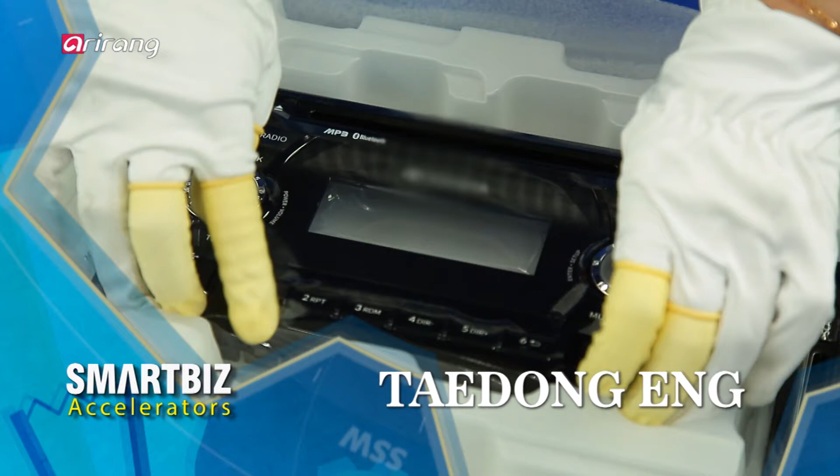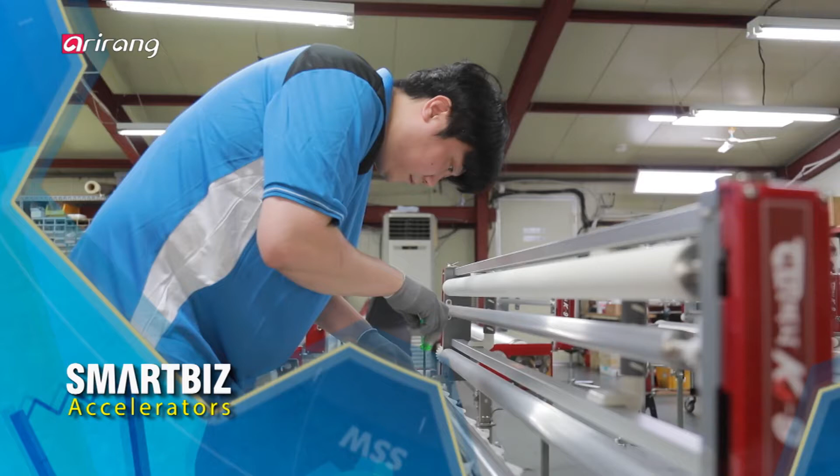SmartBiz Accelerators introduces domestic small and mid-sized businesses that have led various industrial sectors with innovation. This week we look into Taedong ENG, a company specializing in paintwork of automotive parts; Yujin MC, which develops machines useful for life; Eunjin High-Tech, a manufacturer of household appliances through insert injection molding; MPICO, which has developed diversified plastic goods based on advanced technologies; Bora Electric Machinery, a producer of position and tension control products; and Gangdong, a developer of high-precision processing technologies. Stay tuned and explore the innovative changes taking place in these businesses along with the application of a smart factory system.

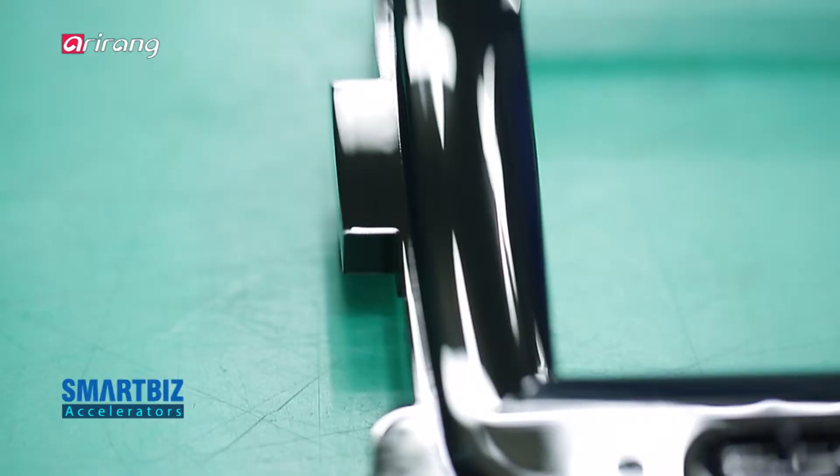Interior materials enhance driver convenience and vehicle value. Taedong ENG is an automotive parts painting company that specializes in painting interior materials like displays and audio devices. Its signature high-gloss paintwork is gaining customers' trust with excellent quality. To realize the perfect color, it has established a mixing program and is improving painting quality through robots. We explore Taedong ENG, a company that leads the automotive paint industry with high-quality technology.

Taedong ENG is located in Chilgok-gun, Gyeongsangbuk-do Province. It specializes in painting and assembling interior materials of cars. Products produced by skilled painting technicians with more than a decade of experience are recognized for quality not only at home but also overseas.

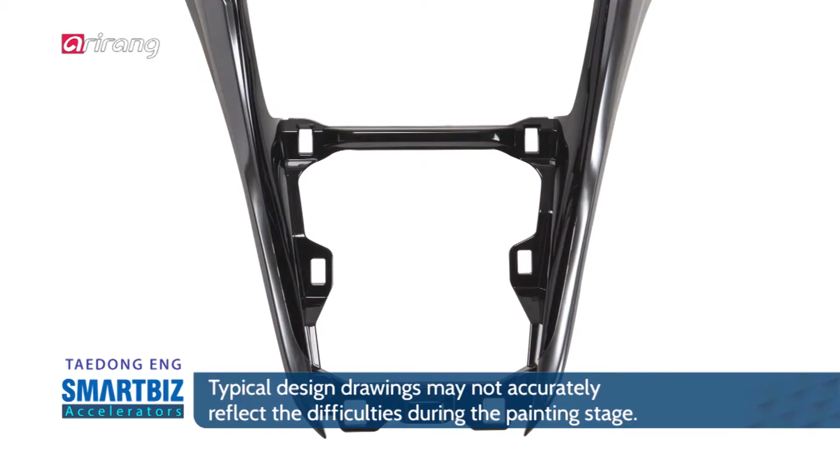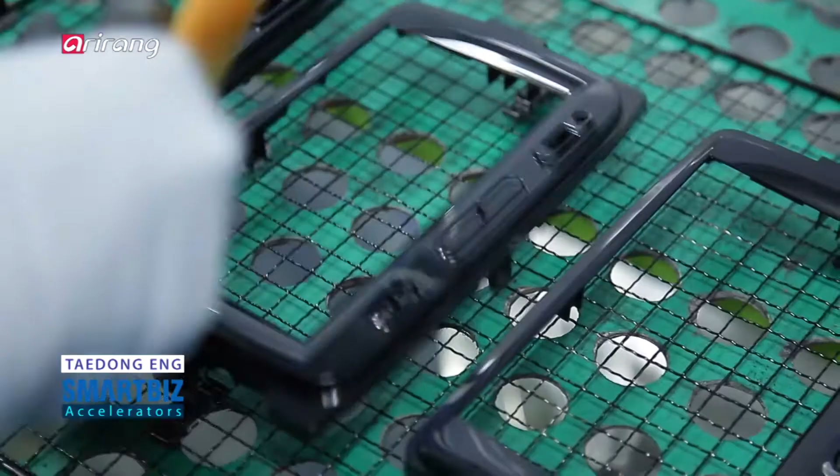Taedong ENG pays close attention to provide an optimal product that corresponds to customer needs. In addition, it thoroughly blocks the inflow of foreign substances to prevent scratches and increase the overall level of completion. In the high-gloss painting process, a drying operation is conducted to remove any moisture or gas from the products.

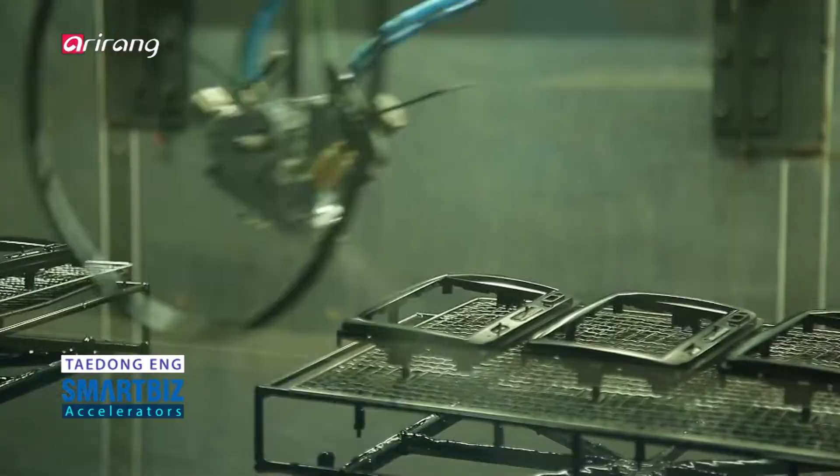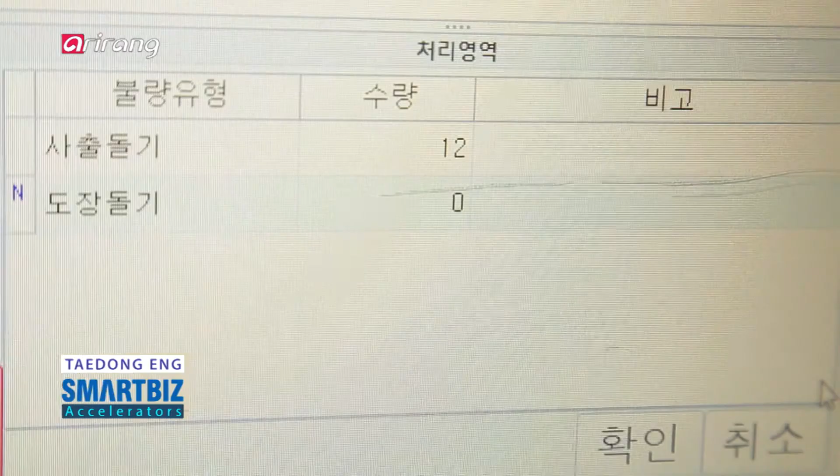The company introduced a partial MES system by participating in smart factory innovation activities. An efficient collaboration system took place as internal communication became more efficient.

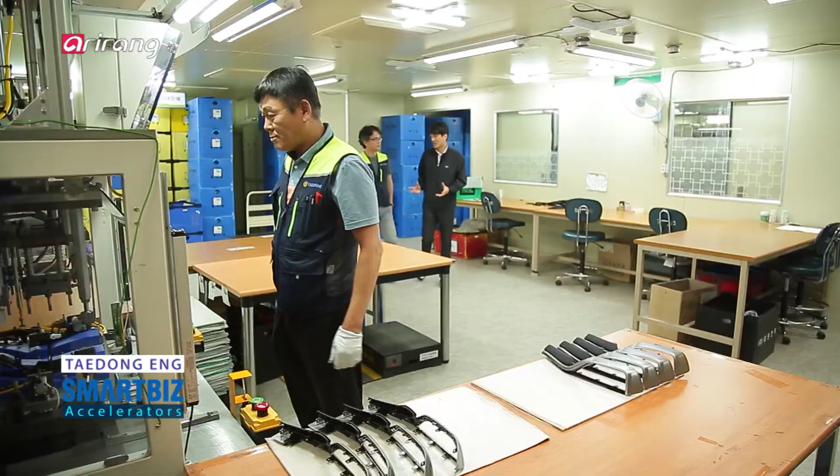The level of satisfaction from its clients is high, as Taedong ENG thoroughly manages contamination and maintains a high level of product quality. The firm makes sure that there is no problem with timely delivery, even in the case of emergency orders.

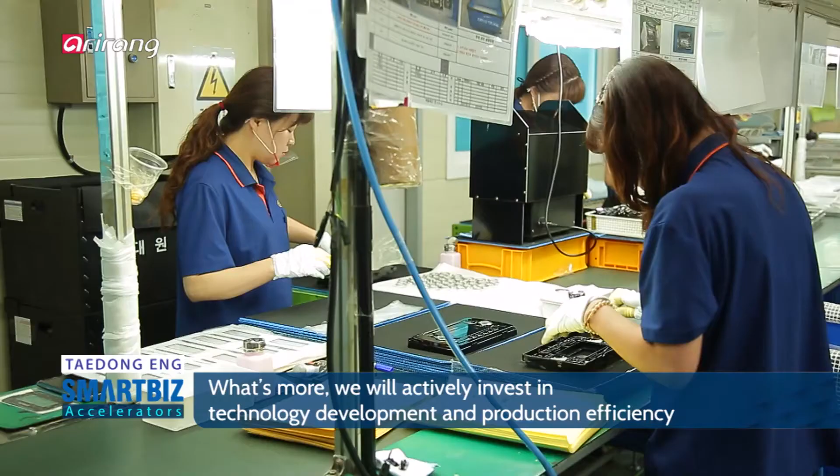Taedong ENG leads in the automotive painting field with its high-gloss paintwork. We hope the company will grow into a global company that is recognized by automakers around the world.

Machines have contributed a lot to improving the quality of life. Yujin MC is making life more convenient by developing various machinery.

It is creating a better environment with its product Wallpaper Doctor, which takes into consideration the health of both paper hangers and tenants.

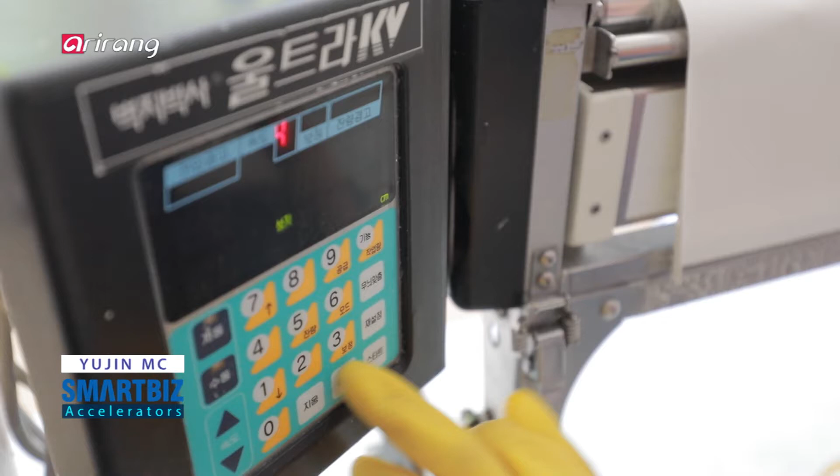Noodle Robo, which automatically cooks the noodles, is also adding to user convenience. Yujin MC is also developing other machines to be used in the kitchen for cooking purposes.

We explore Yujin MC, which possesses a wide variety of products.

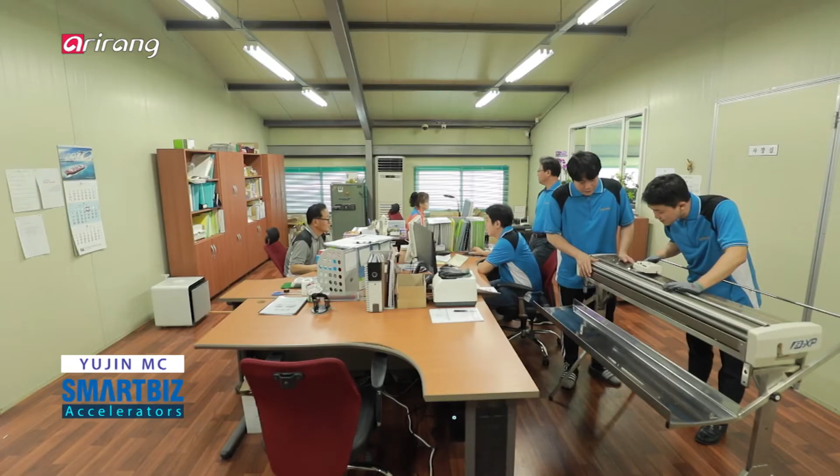Yujin MC is located in Goyang, Gyeonggi-do Province. It developed devices that are essential to consumers in the fields of interior design, cleaning, and food. The firm is rapidly growing thanks to its innovative ideas and products.

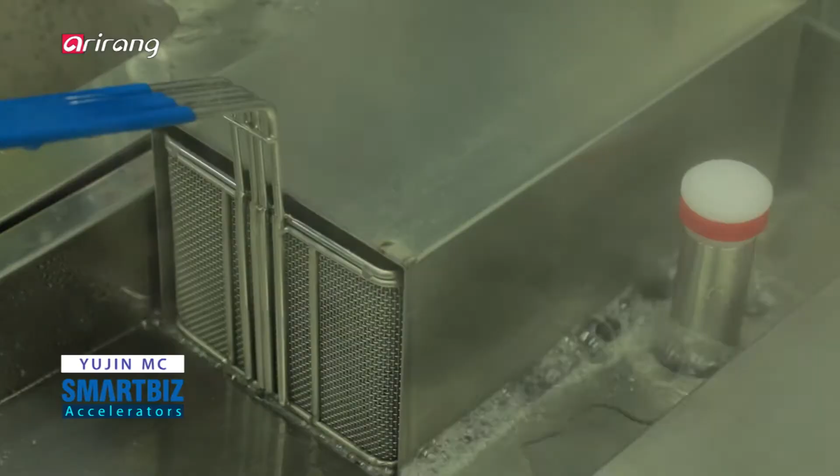The device can maintain a consistent flavor. Depending on the type of noodle, the Noodle Robo automatically adjusts the temperature and time to create the optimal taste. It is serving as an all-round cooker as cooking becomes easy.

Thus, the Noodle Robo is being supplied to various places like large stores, franchises, and other noodle stores.

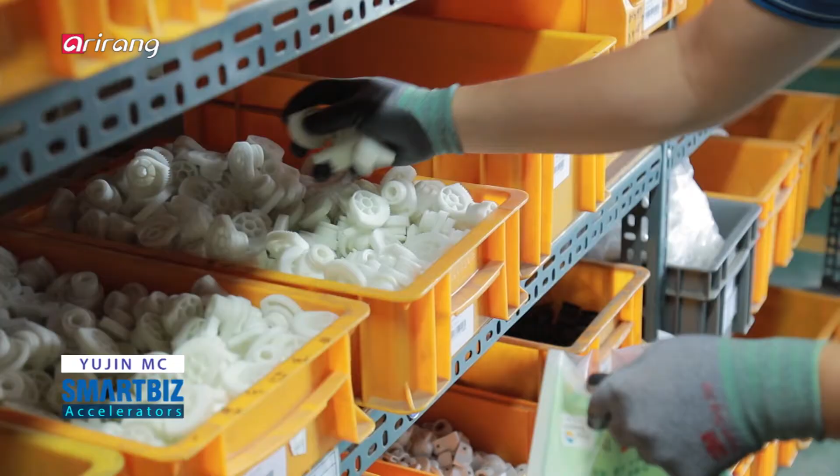Yujin MC has established the Smart Factory system thanks to help from Samsung Electronics. Yujin MC introduced a barcode scanning equipment to check inventory and production in real time, resulting in a 10% increase in sales.

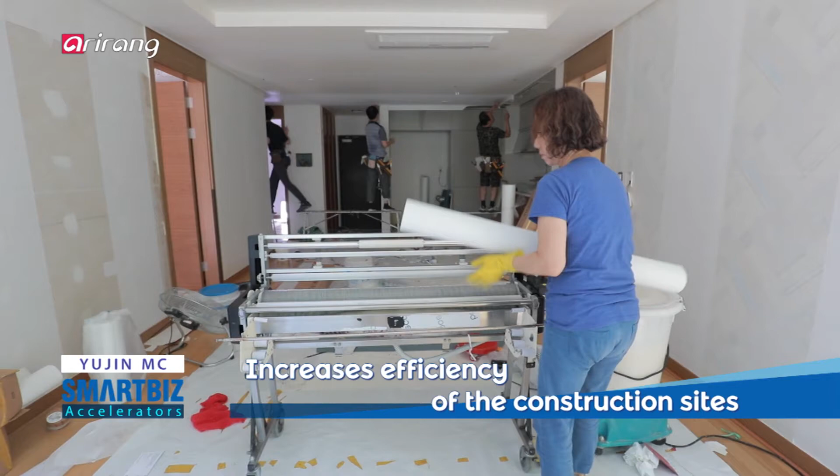An increasing number of places are using Wallpaper Doctor for these advantages.

Wallpaper Doctor is equipped with a special function that can precisely paste the glue at 0.05mm intervals. Thus, quality is further enhanced with increased accuracy.

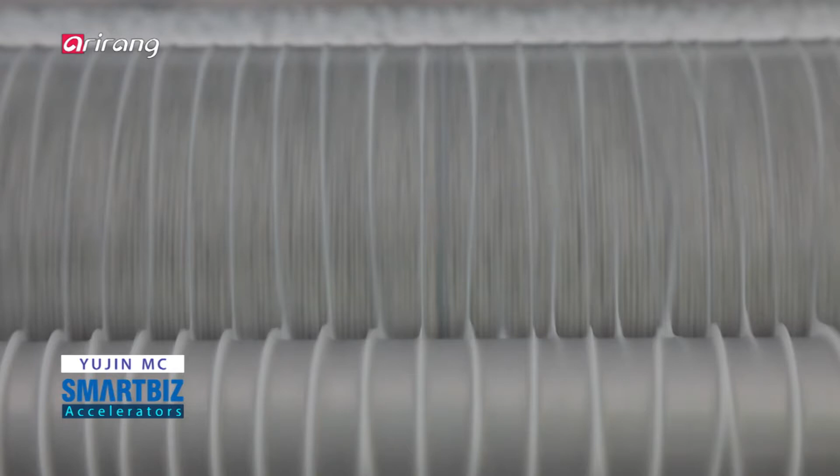Yujin MC is a company that does not cease to grow by developing various automated machines in many fields. We hope it will continue to put top priority on customer satisfaction with good technology and competitive products.

There is a company that is growing faster than the changes in the market. Eunjin High-Tech specializes in producing components for household appliances through the insert injection molding process. The combination of plastic and metal provides differentiated products of excellent durability and creates added value.

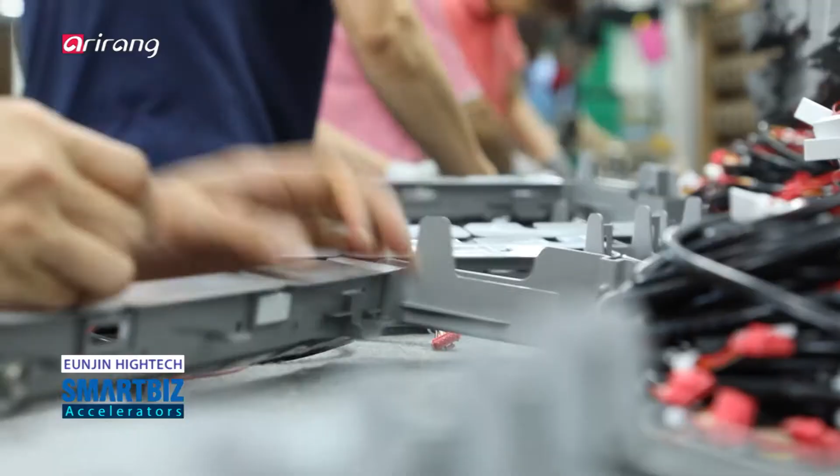Cameras are also installed in production facilities, and special care is being taken to prevent all safety accidents. It has received recognition from related industries for its high-quality products. We explore Eunjin High-Tech, a company that is constantly seeking innovation.

Eunjin High-Tech is located in Gwangsan-gu, Gwangju. Eunjin High-Tech manufactures household appliance parts with an insert injection molding process that combines plastic with metal. Through steady technical research, the company is expanding its business areas every year while strengthening product quality and competitiveness.

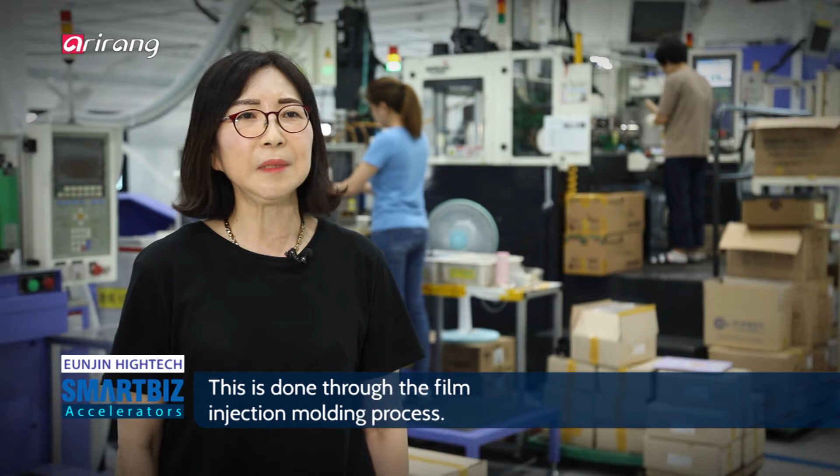Besides the use of injection molding, Eunjin High-Tech has secured a competitive edge in manufacturing by introducing the film injection molding process, which enables printing of letters.

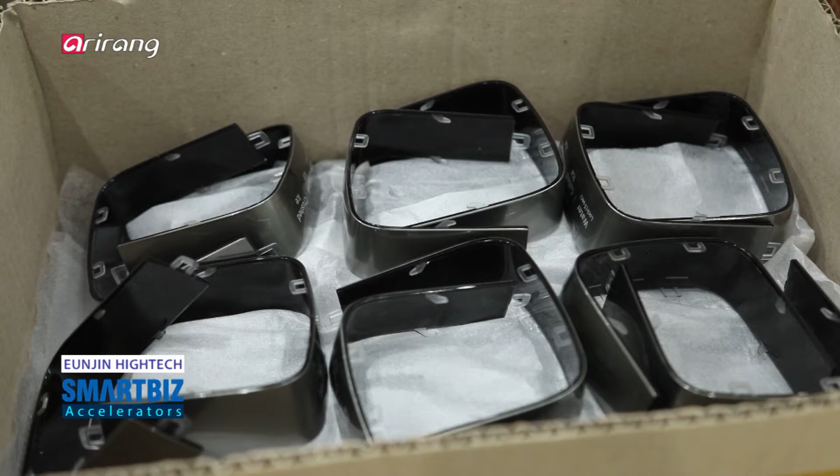Therefore, the firm is careful to produce flawless products based on sophisticated technology.

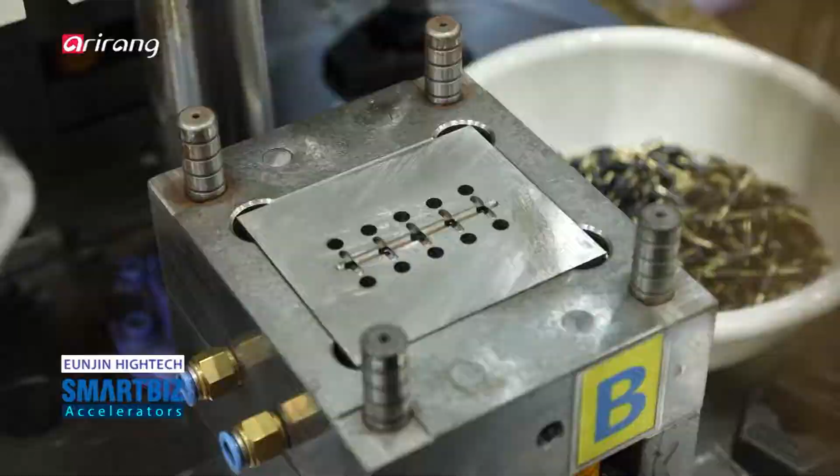At the time of its establishment in 2009, the company started with one insert injection machine. But now it operates a total of 6 units, becoming a company that specializes in insert injection. The component is inserted into the machine in the correct position, and the injection process begins.

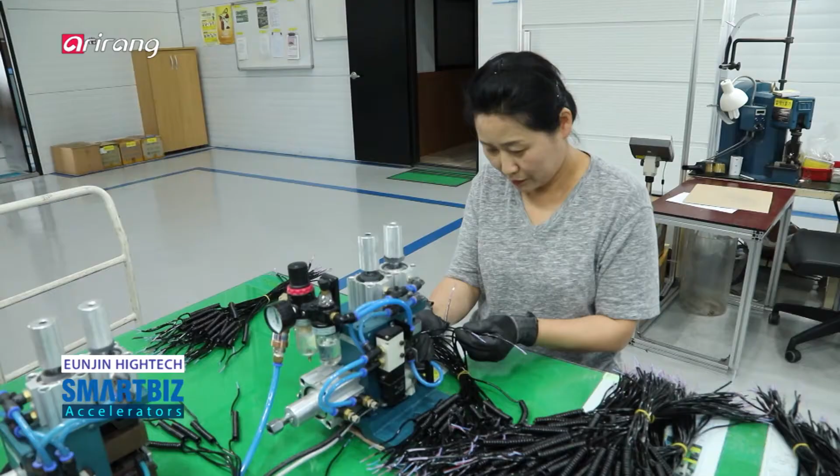Unlike general injection molding processes, insert injection requires a high level of skill set and attention to detail. Completed products go through a strict inspection process before being shipped out.

완성된 제품은 검사 장비와 계측 장비를 사용해 검수를 진행하고 있습니다. 사출로 생산한 가전제품 부품은 1차로 육안 검사를 한 뒤에 2차로 확대경을 사용해 표면과 제품 안쪽까지 꼼꼼하게 확인하고 있으며, 하네스는 조립이 끝나면 계측기를 통해 전기를 흘려서 직접 검사하고 이상이 없으면 공급합니다.

A company that has been doing business with Eunjin High-Tech for roughly 10 years has paid a visit. It supplies Eunjin High-Tech with electric wires, the company's main raw material. The partnership is based on trust to produce high-quality products.

저희 경신전선은 특수전선, 산업용 케이블, 태양광, 풍력 등의 친환경 제품을 생산 중이며 은진 하이테크에는 가전 청소기용 전선을 공급하고 있습니다. 기계적, 전기적, 화학적 특성 및 내열성 등을 향상시킴과 아울러 유연하며 이동 굴곡이 뛰어난 제품을 공급하고 있습니다.

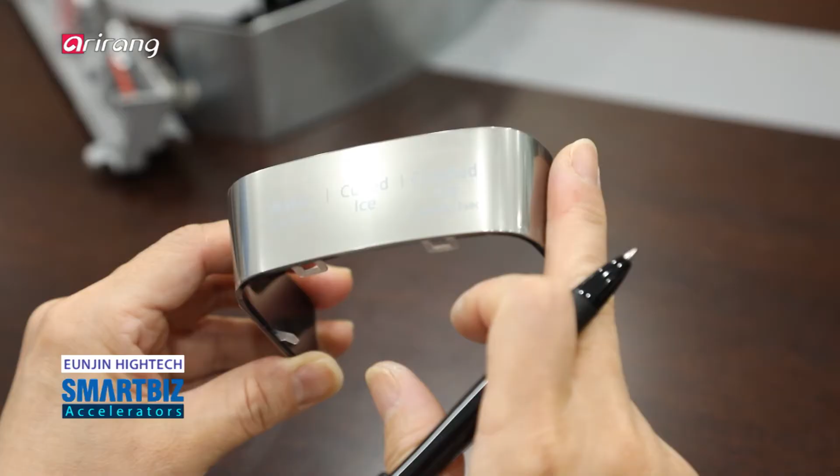Eunjin High-Tech is focusing on producing auto parts and air purifier filters that can be made with the insert injection molding process. At the same time, it is continuing to develop new products and expand exports of refrigerator parts.

현재 연구소에서는 센서와 필터, 부품을 중심으로 다양한 제품군을 연구 중에 있습니다. 공기청정기 필터류와 자동차 부품, 센서 부품 등을 개발하고 있으며 SMT 설비 계획에 있습니다.

Eunjin High-Tech is devoted to emerging as a new powerhouse in the insert injection molding field. We hope it will continue to grow beyond Korea out to the global market.

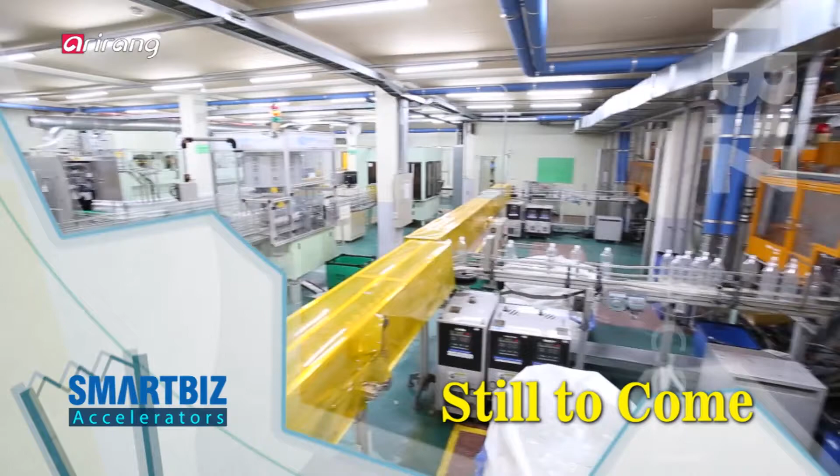Still to come, SmartBiz Accelerators takes a close look at MPico, which has developed diversified types of plastic goods based on advanced technologies; Bora Electric Machinery, a producer of position control and tension control products; and Gangdong, a developer of high-precision processing technologies. Stay tuned as we find out more about the advanced technologies of domestic small and mid-sized businesses. Don't go away.

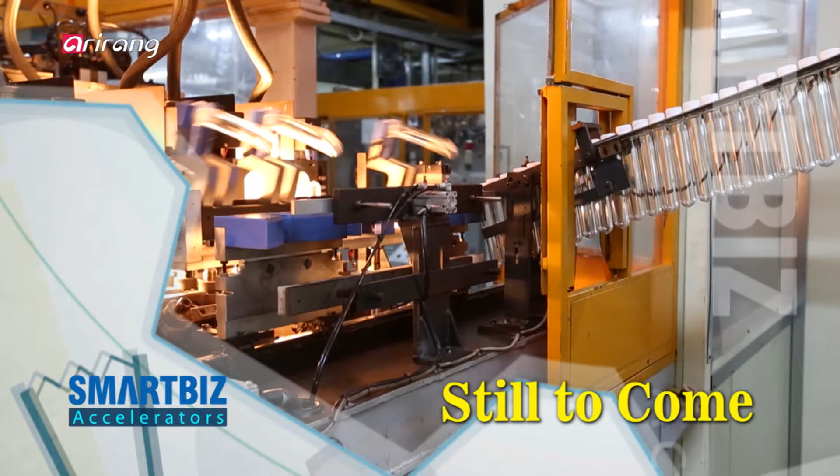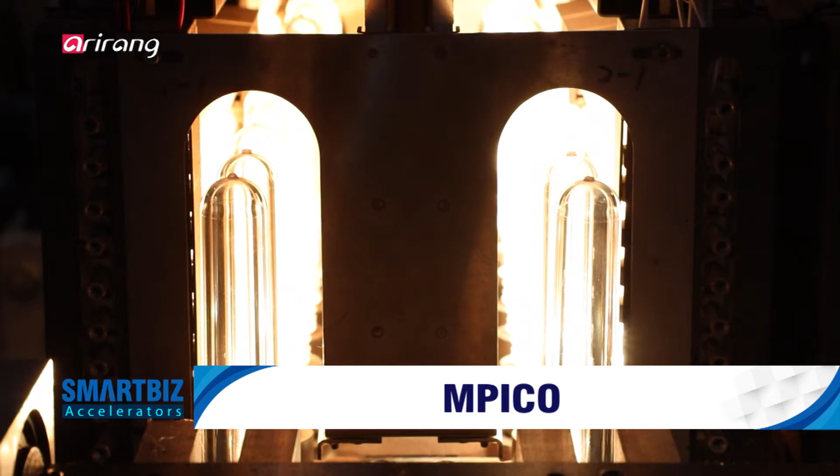MPico is a small business with strengthened competitiveness, and it has gained recognition in the global market by developing innovative technologies and management systems. By developing plastic products with light weight, it has improved the convenience of consumers and strengthened its position in the industry.

Also, it has introduced the inline production system to the manufacturing of heat-resistant plastic bottles. As a result, it has reduced cost and improved product quality. The company has provided diversified types of products based on cutting-edge technologies. We explore MPico, a leading maker of plastic goods which has broadened the scope of business to the domestic and global markets.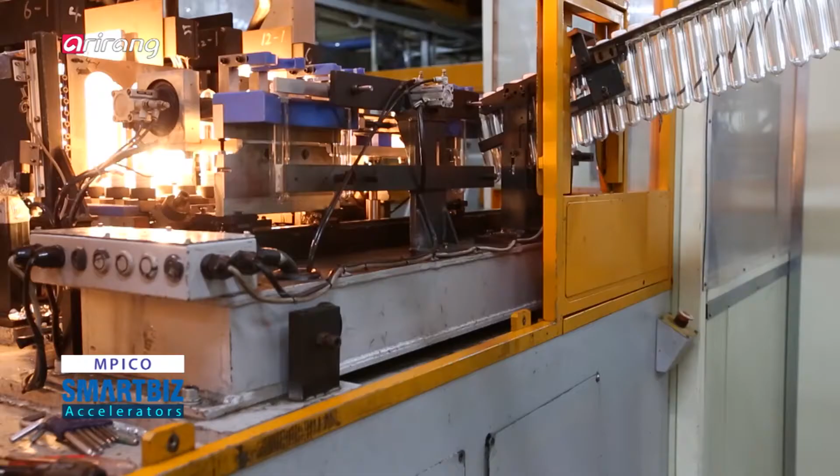MPICO is located in Gyeongsan, Gyeongsangbuk-do Province. The company specializes in manufacturing plastic bottles, automobile parts, and cleaning filters. Thanks to the accumulated experience of engineers, it has achieved growth as a leading manufacturer of plastic goods in the domestic market.

저희 회사는 플라스틱 가공 산업을 주로 하는 회사입니다. 특히 국내 대기업에서 생산하고 있는 플라스틱 제품을 즉시 납품 대응하기 위해서 페트병을 처음 시작하게 되었습니다.

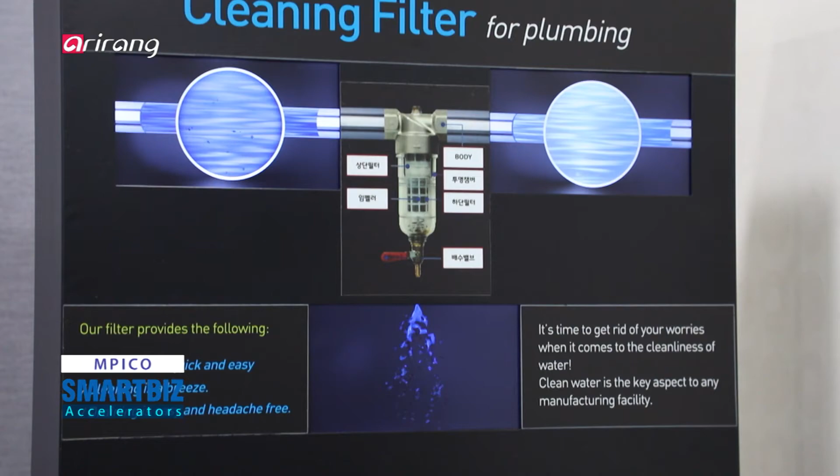Cleaning filter, which can filter out foreign substances, is one of the major items produced by MPICO.

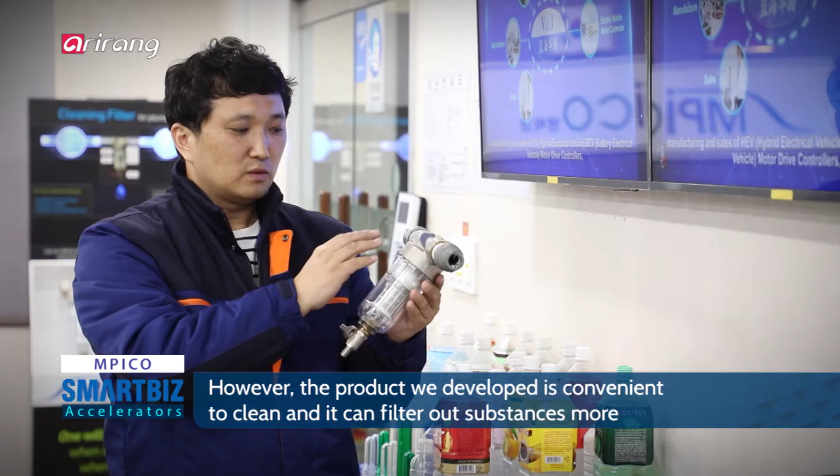저희 필터 같은 경우에는 여기 보시면 밑에 밸브를 달아놨습니다. 타사 제품들은 밑에 배수 밸브가 없기 때문에 청소를 할 때 분리를 해서 청소해야 되는 불편함이 있는데, 저희 회사 제품은 청소도 용이하게 되어 있고 이중 구조가 되어 있기 때문에 원활하게 걸러줄 수 있는 그런 특징이 저희 회사만의 특징입니다.

Wiper, which can secure a clear view for a driver in case of rain, is another item produced by the company. 두 번째는 자동차에 들어가는 와이퍼류로, 현대기아에 저희가 납품을 하고 있는 제품이며 지금 시중에 있는 자동차에는 장착이 되어서 나가는 걸로 알고 있습니다.

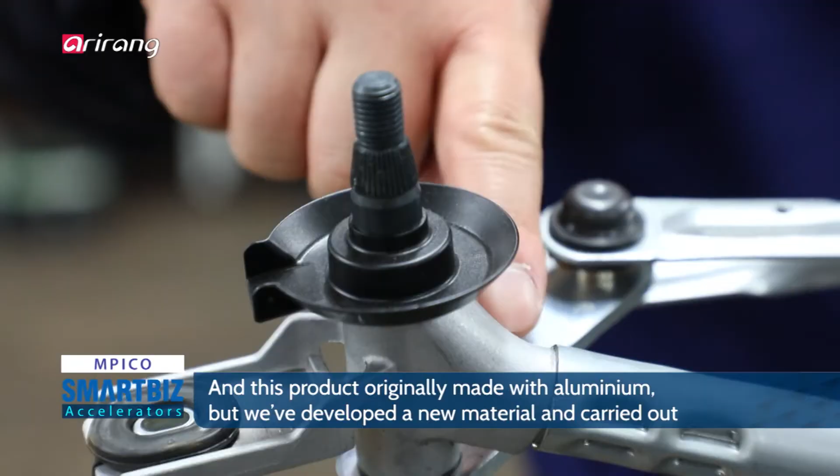Wipers are attached to the front and back sides of the car, and the company has produced diversified types of wipers, including those for compact cars and large-size buses. 지금 독일 보쉬하고 기술 제휴해서 와이퍼 어셈블리를 만들고 있는데, 여기 보시는 이 제품은 알루미늄으로 되어 있는 제품인데 저희들이 이번에 신소재를 개발해서 플라스틱 제품으로 테스트를 하는 단계입니다.

MPICO has developed heat-resistant plastic bottles with its own technology. As it goes through the heat treatment process, the shape of the bottle doesn't change even when pouring hot liquid.

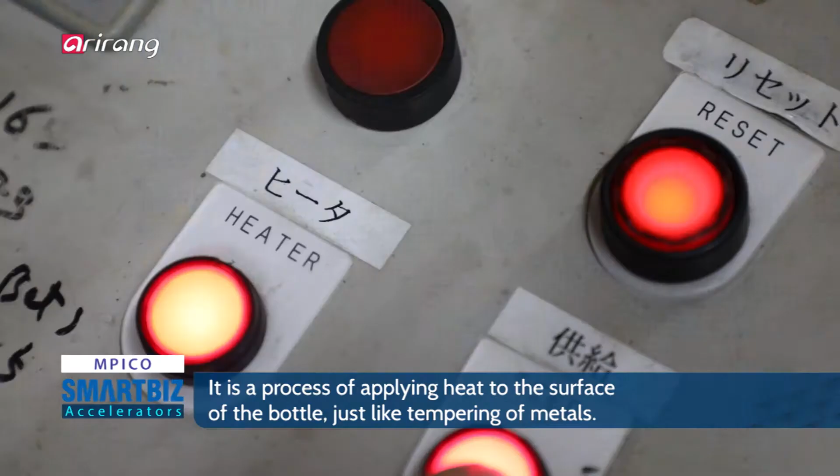모든 페트병의 제조 과정에는 블로잉이라는 과정을 거칩니다. 이것은 마치 쇠를 담금질하는 것처럼 병의 표면에 열을 가해서 강도를 끌어올리는 행위인데, 타사 제품은 한 번의 블로잉을 거치지만 우리는 1차, 2차, 3차에 걸쳐 총 세 번의 열을 가하게 됩니다. 그래서 병의 강도가 더 높아지는 것입니다.

The one-stop manufacturing system is what made the company more competitive than others. It can contribute to strengthening price competitiveness and reducing cost.

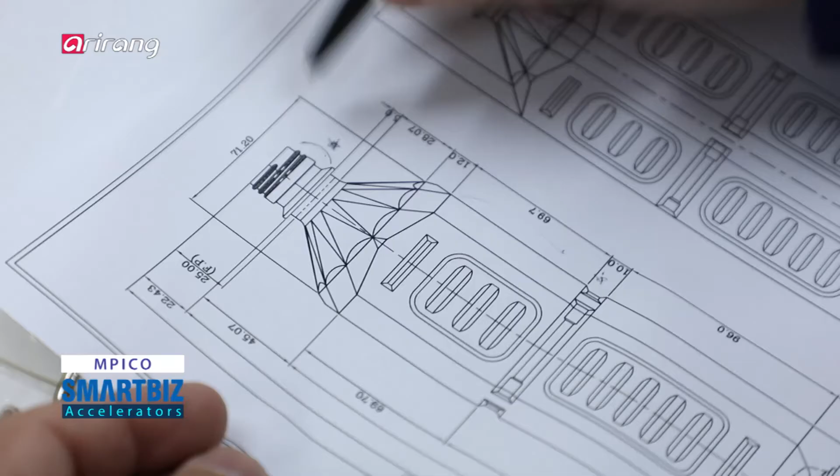MPICO has enjoyed positive responses from clients as it has provided high-quality goods at affordable prices, and it has maintained close relations with customers. The company has gained recognition as a provider of reliable products.

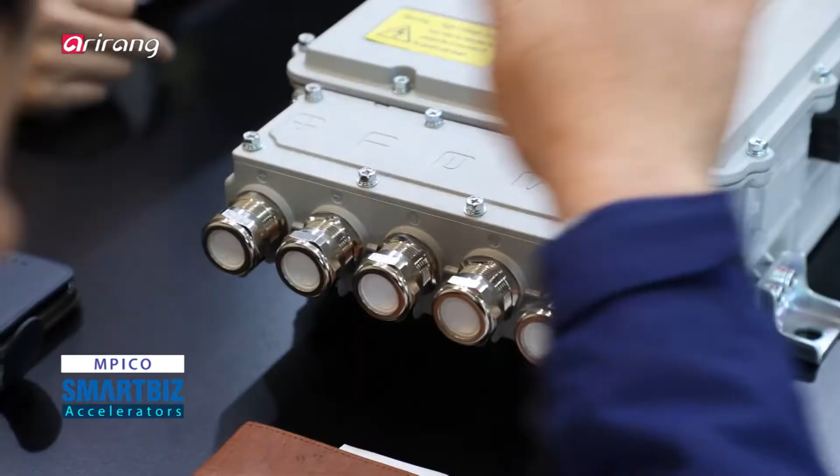MPICO aims to make a huge leap forward by enhancing the competitiveness of the plastic bottles and motor controllers. The company has continuously promoted research and development activities to captivate the tastes of global consumers, and it is planning to make inroads into the US and Brazil.

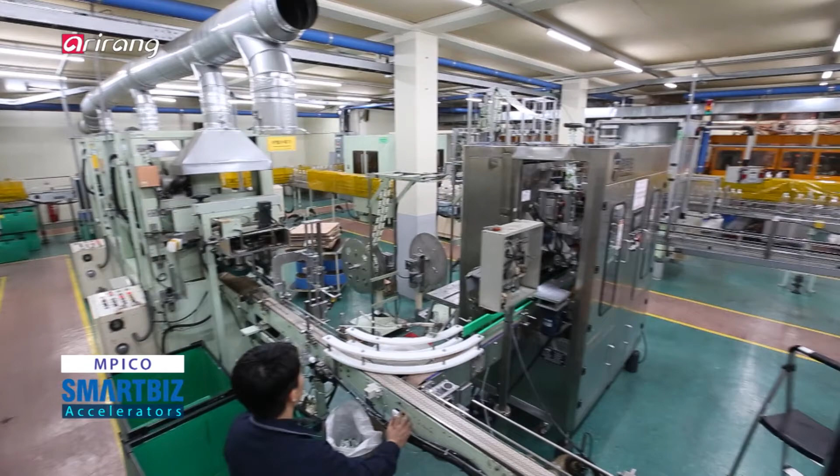MPICO has produced eco-friendly products that can protect the environment and humans. As a company that puts top priority on customer values, it is expected to carve out a new space in the field of plastic goods in the near future.

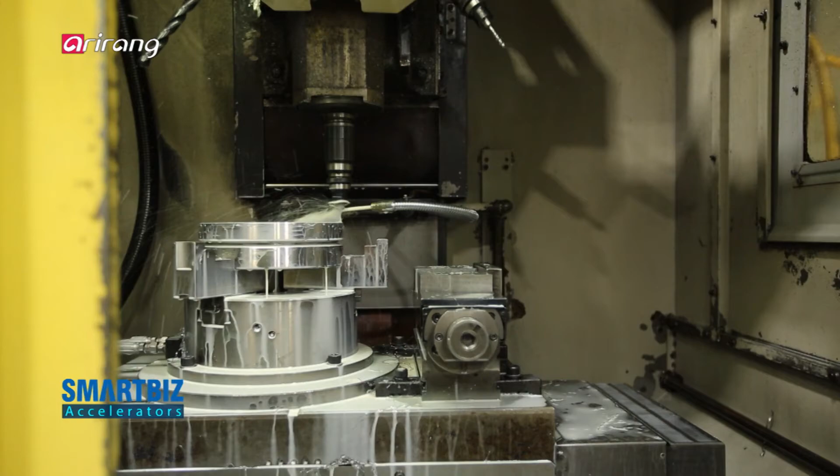Including the powder clutch and powder brake, the company has developed CPC and EPC systems, which are position controllers. We introduce Pora Electric Machinery, a company specializing in position and tension controllers.

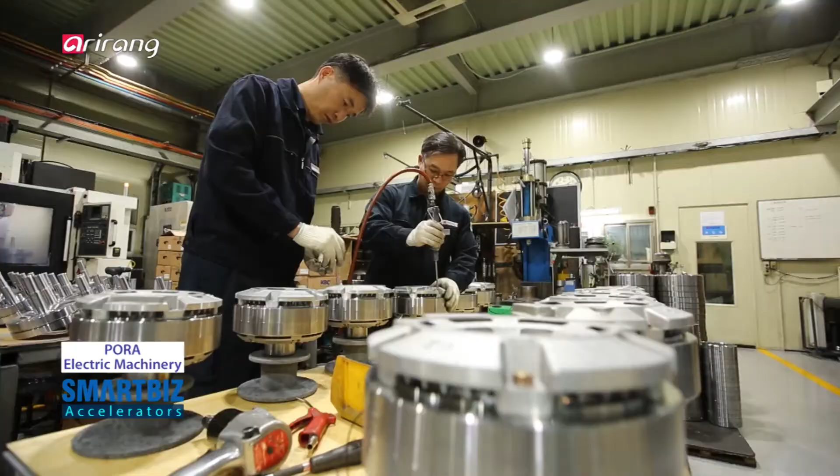Pora Electric Machinery is located in Gunpo, Gyeonggi-do Province. The company has mainly produced tension and position control products for steel, printing, and packaging industries. It has produced about 400 different types of products, and tension controllers and position controllers for steel, printing, and packaging industries are the main items.

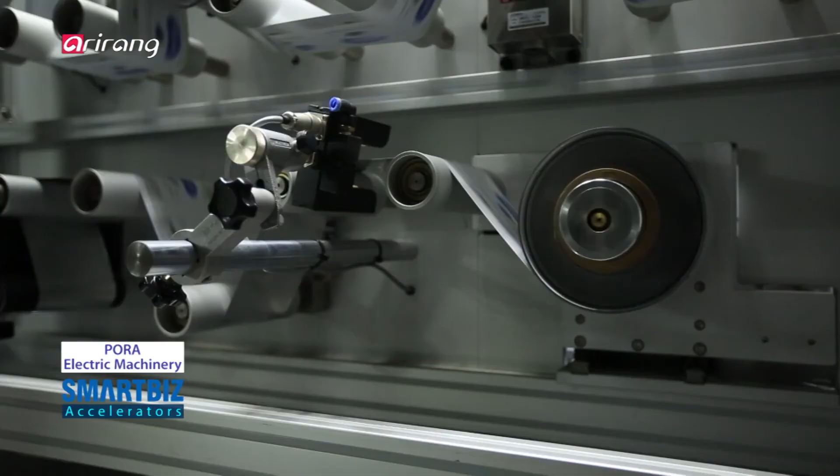Powder brake and powder clutch, which is tension controllers, are the major products that have been provided by the company for a long period of time. The tension controller can control the strength during the manufacturing process, and it helps stretch the fabrics tightly.

종이나 알루미늄 호일 같은 롤로 감겨져 있는 것을 웹이라고 합니다. 인쇄나 커팅 시 파우더 브레이크는 풀 때 쓰고, 파우더 클러치는 감을 때 쓰기 때문에 토크와 장력을 안정시켜서 원단이나 종이를 순조롭게 돌리거나 감을 수 있게 하는 기계적 장치입니다. 장력 제어 장치는 제품의 불량이 발생되지 않도록 순간순간의 장력 변동을 정밀하고 빠르게 검출하여 작업 공정에 맞춰 장력을 안정적으로 유지시켜줘야 하며, 정밀도, 정확성, 안전성, 신뢰성 등이 가장 중요한 조건입니다.

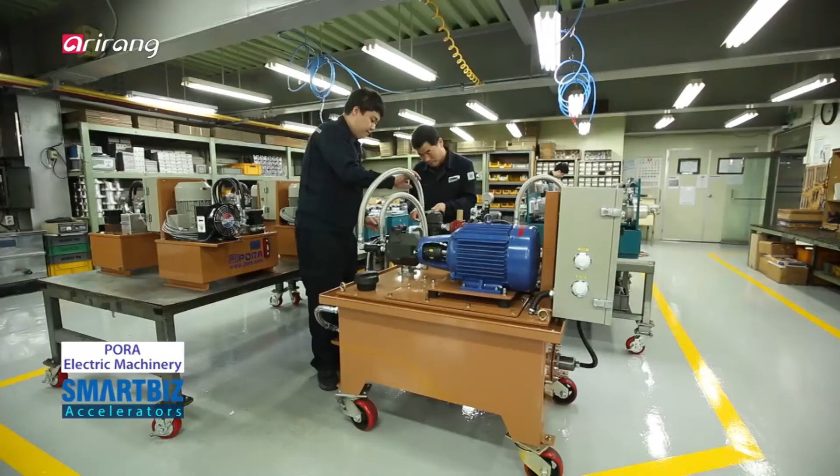Position controller is another major item that has been produced by the company. PR-SMI and PR-PMI are electromagnetic inductive products. Regardless of sunlight and dust, it can control the location of steel products by recognizing the changes in size that might be caused by a disturbance in the electromagnetic field.

기술연구소에서는 제품의 제어 정밀도, 측정 정확도, 응답 속도, 분해능 등 제품의 신뢰성을 향상시키기 위해 많은 노력을 기울이고 있습니다. The technical laboratory of the company has made utmost efforts to develop products that can gain trust from customers.

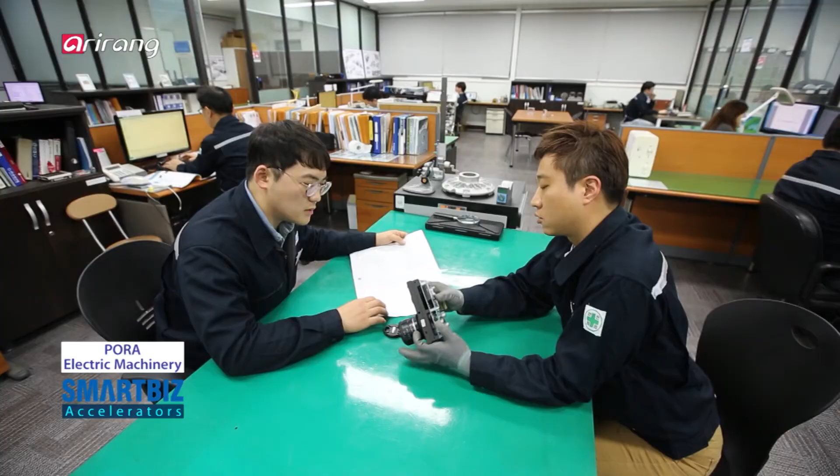Experienced researchers have successfully developed CPC, or Center Position Control, and EPC, also known as Edge Position Control products. And they were registered as the official supplier of POSCO Sourcing Group for the first time in the domestic market.

기술연구소에서는 보라전기 공업 미래 성장을 견인할 신제품 개발 및 신기술 연구를 수행하고 있습니다. 또한 국내 및 해외 사업부를 통해 수집된 VOC를 바탕으로 제품의 품질 개선 작업을 꾸준히 진행하고 있으며 현장에서 직접 전문 기술을 지원하는 역할도 수행하고 있습니다. The advanced technologies of Pora Electric Machinery have gained recognition in the market, and the company has achieved various certifications including ISO 9001.

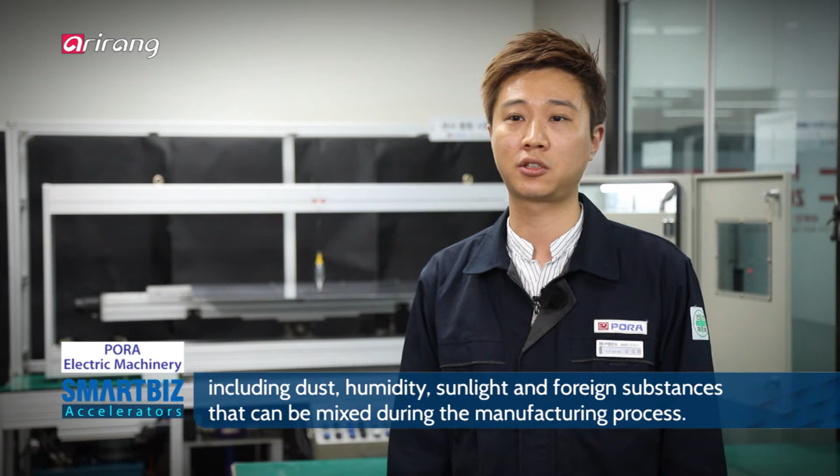특별히 자랑하고 싶은 제품은 인덕티브 CPC 센서입니다. 자기 유도 방식을 이용하여 먼지나 습기, 햇빛, 그리고 산업 공정 중 발생하는 기타 이물질을 제외하고 온전히 철판만 검출하여 그 위치를 컨트롤러에 전달하는 역할을 합니다.

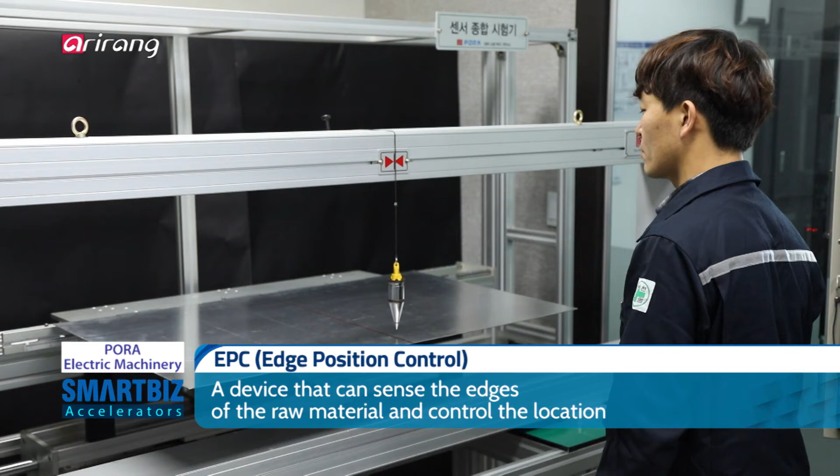CPC and EPC are the products that can move the location of the strip steel to the center or other places. CPC helps the strip steel to be always located at the center. And EPC is a technology that helps roll up the steel plates after the manufacturing process. CPC and EPC are the critical technologies for the accurate and safe production of metal products.

타 경쟁사와 비교했을 때 후발주자임에도 불구하고 제품의 성능이 뒤떨어지지 않는다는 것과 현장 상황에 맞게 고객 요구에 대응 가능한 제품이라는 것, 그리고 가격 경쟁력까지 갖췄다는 것이 저희 제품의 강점이라고 생각합니다.

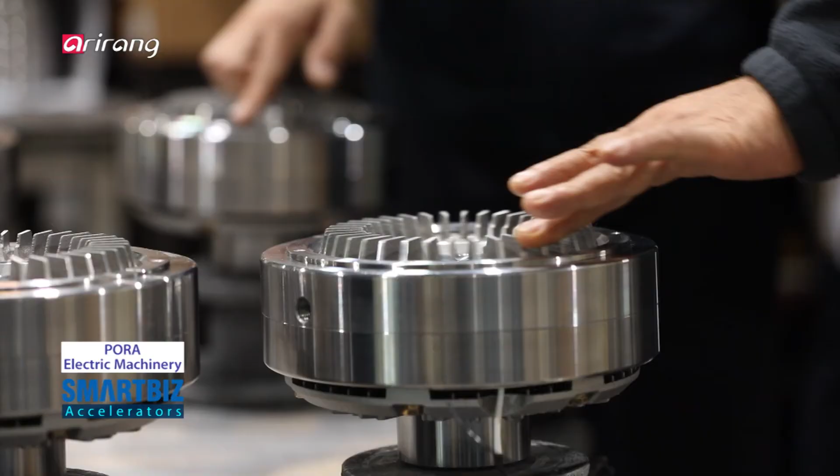The products of Pora Electric Machinery have been provided to about 20,000 companies, including Samsung Electronics. A lot of domestic companies have shown a lot of interest in the controllers developed by Pora Electric Machinery.

보라전기 공업 제품은 1년 무상 서비스와 사용자 부주의가 아닌 제품은 즉시 무상 교체를 해줍니다. 작업 현장의 조건을 최우선으로 고려하여 만든 제품이기 때문에 다양한 부분에서 강력한 내구성을 지니고 있고 문제 발생 시 AS 전문 부서가 신속 정확한 처리를 해주기 때문에 매우 만족합니다.

The company has been acknowledged for having advanced technological capabilities by participating in a lot of exhibitions. The controllers for strip steel as well as printing and packaging industries have gained recognition as reliable goods.

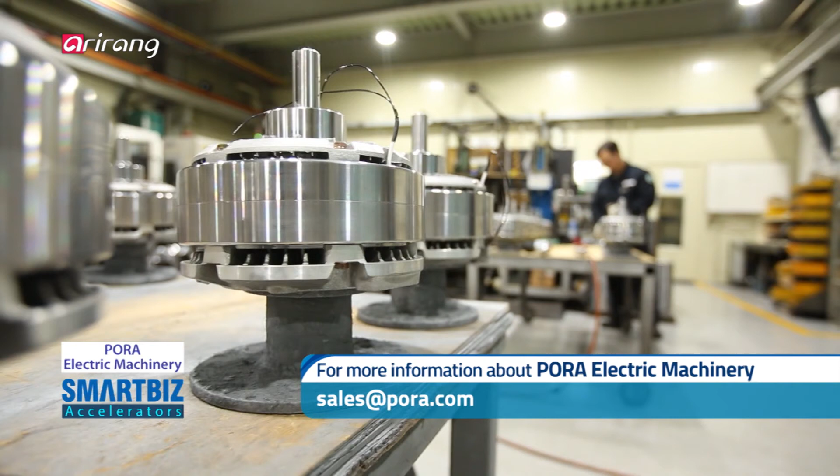There is a company that has led the field of mechanical cutting and machining by developing precision processing technologies and providing high-quality products. It is Kangdong, a manufacturer of parts for dental equipment and automobiles.

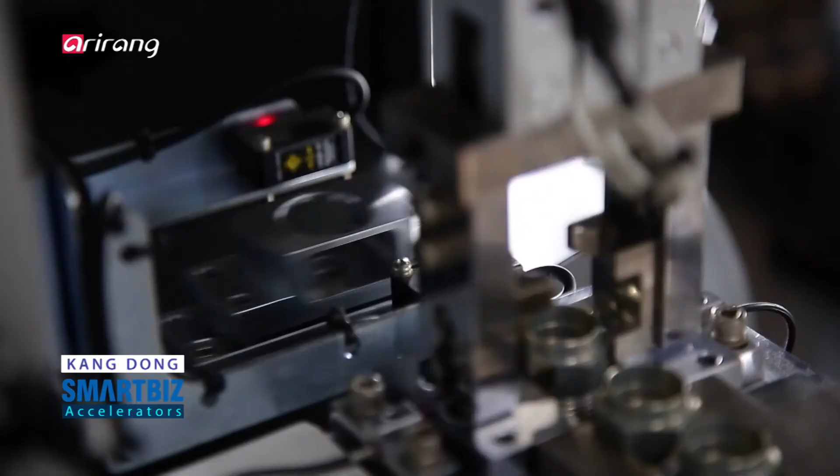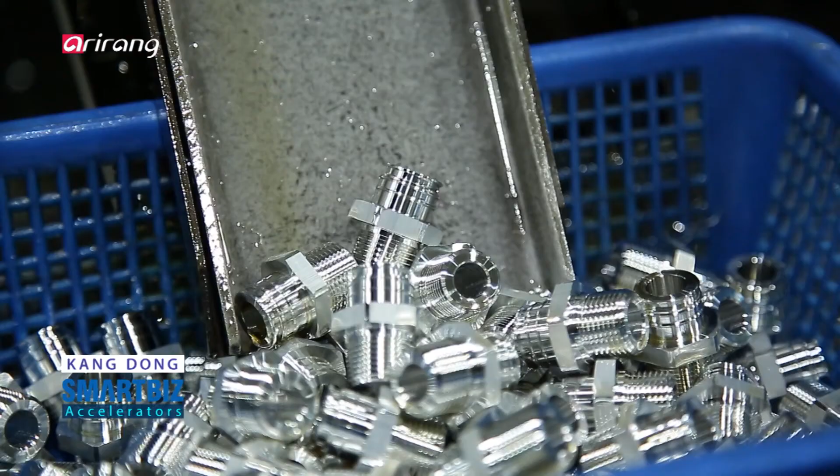Based on the accumulated manufacturing technologies, the company has produced high-quality products. Also, it has developed various types of processing technologies for different materials, including general and special materials. We introduce Kangdong, a leading business in the fields of cutting and machining for medical, automobile, and high-precision sectors.

Kangdong is located in Gumi, Gyeongsangbuk-do Province and specializes in high-precision parts. Since its establishment in 2000 as a manufacturer of parts for automatic temperature control equipment, the company has expanded its scope of business to precision parts for medical devices.

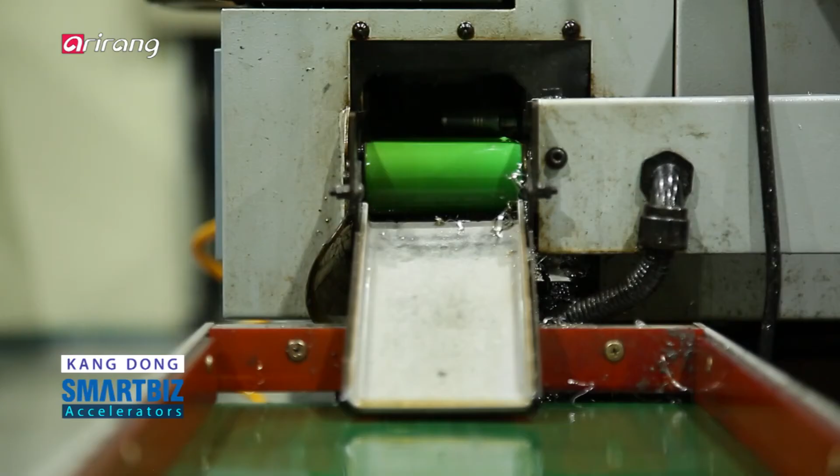Based on the experience accumulated over a long time, the company has successfully processed aluminum components, which are normally difficult to process. The company has never even had a single defective product so far.

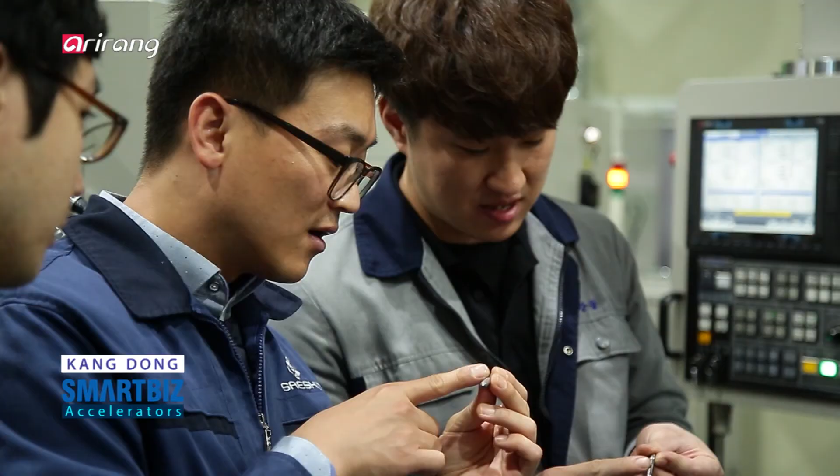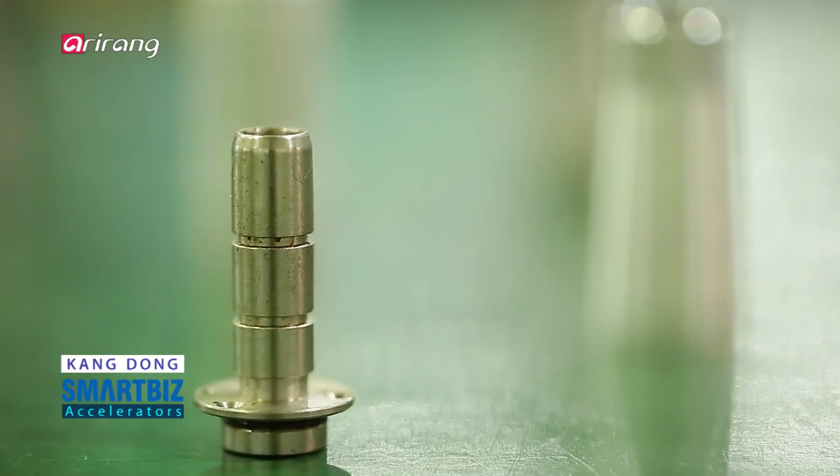Also, in the case of dental equipment parts, the company has developed technologies that can perfectly realize the detailed sizes and tolerances based on advanced manufacturing facilities and programming solutions. As the head parts of dental equipment have a curved design and a difference in height, a high level of precision is the most critical element to produce high-quality components.

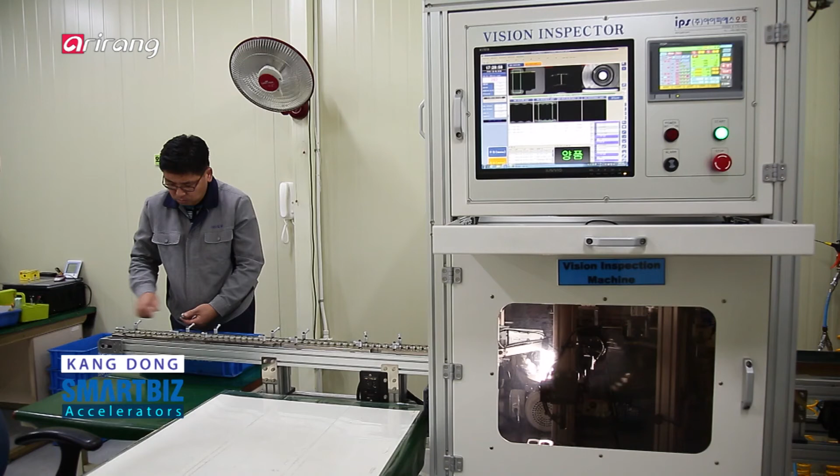As a provider of precise components, the company has carried out thorough inspections on the products. The company has participated in the Smart Factory project promoted by Samsung Electronics and has implemented the vision inspection machine, which has contributed to improving efficiency.

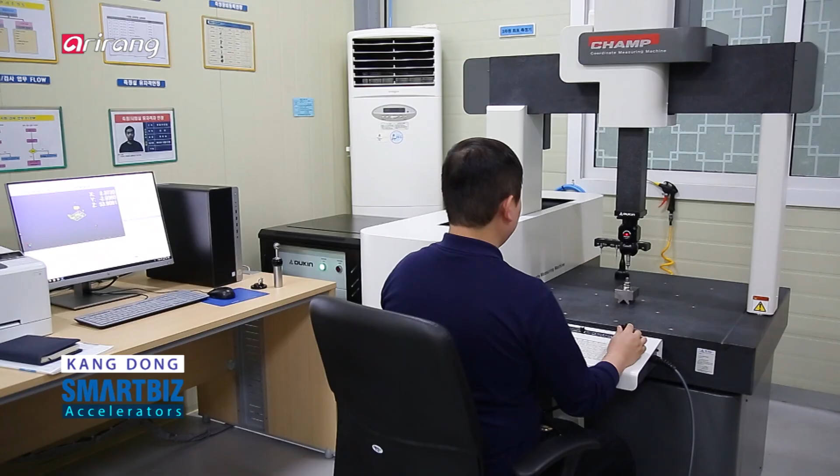I have customers and connections pretty much in North America and Europe. My idea is to bring customers from North America as well as Europe to make use of KD's expertise in these components. As part of an effort to develop its own precision processing technologies, Kang Dong has boosted research and obtained certifications.